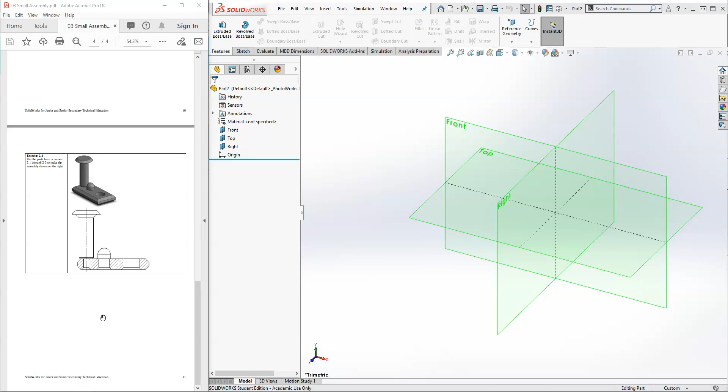Hello and welcome to this tutorial. We're creating this small assembly. It's a three-part assembly: we have a little peg, a large peg, and a rectangular block that they fit into.

If we go onto the resource page on Moodle, the small assembly PDF is there.

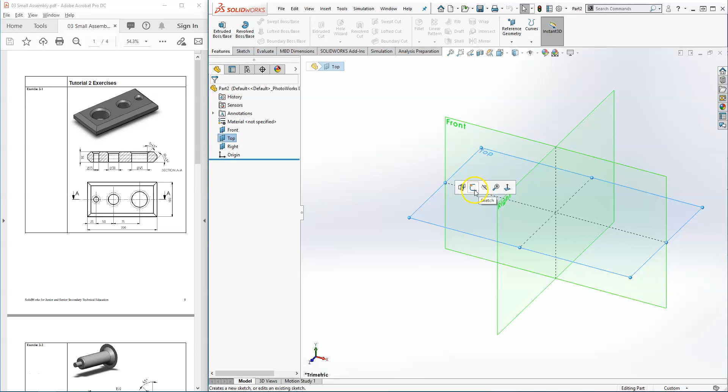Let's get started on this first block. I'm going to put my origin right in the middle of the block. We'll create our sketch on the top plane, and try to make the isometric view the same.

I'm going to create a center rectangle, and turn off my planes. We'll add a few dimensions: 100 by 200. For this first part, that's all I'm going to do.

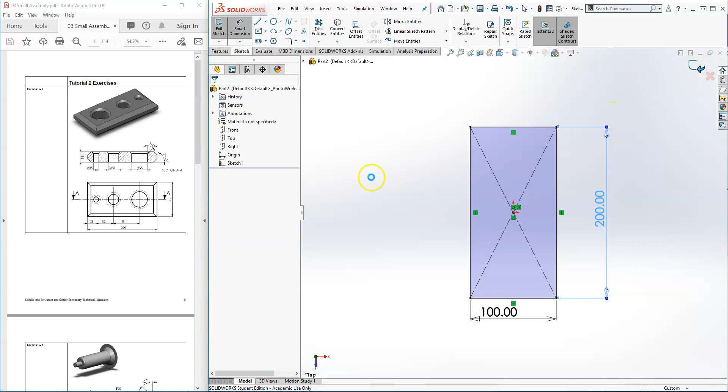Then I'm going to extrude it, extruding it down this time, with a thickness of 30.

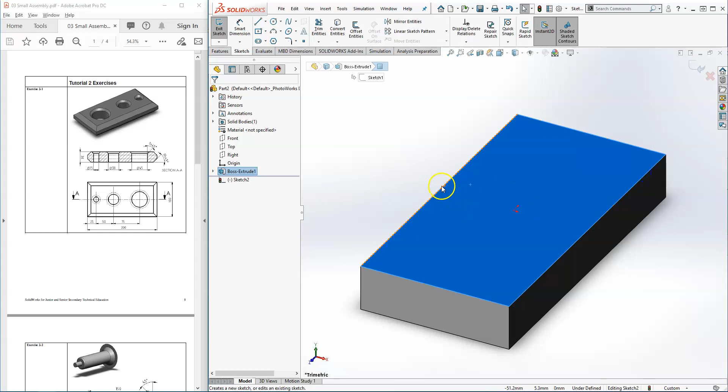So there's the block, and now we're going to add a sketch on top of it with 3 circles. You don't have to be super neat. We'll control-select the 3 centers of the circles, the center point, and the origin, and make them all vertical so they're in a straight line.

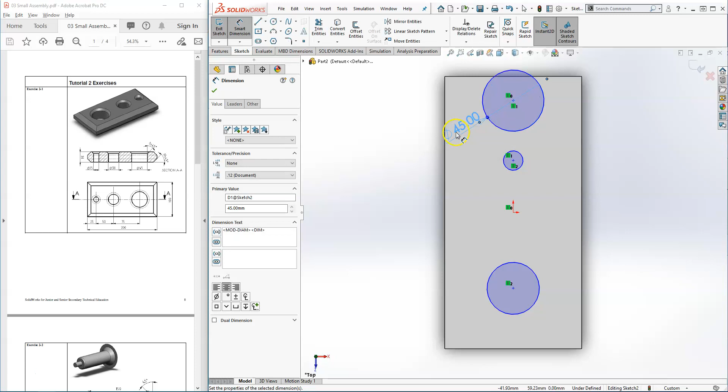Now we'll add some dimensions. The large hole is 45, the second hole is 30, and this last one is 15.

Now all we have to do is add those dimensions that are in the drawing. This one will be 25, and we'll add a dimension between them, dimensioning everything exactly like it appears on the actual drawing.

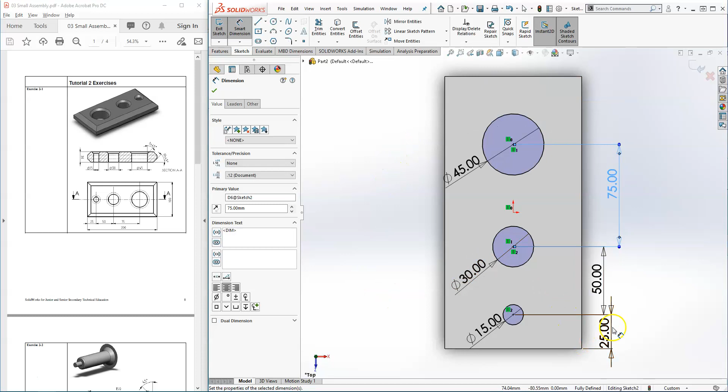It's probably a really good habit to get into, to just add dimensions as you see them on the drawing. We'll cut that. You could have used the hole wizard, but we'll just do a through-all cut of those circles.

Now there are 2 other things: we have chamfers on each of the holes, and a chamfer on both the top and bottom edge. We'll do that top chamfer first.

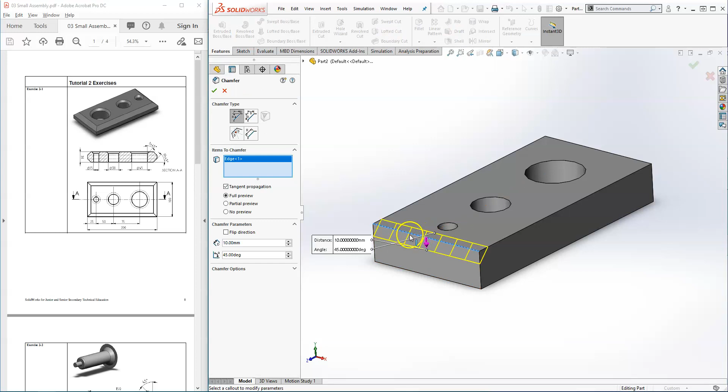The chamfer is under the fillet. We'll select this one, these top edges. You don't actually have to rotate it; you can just find those hidden edges if you hover your mouse close enough to them.

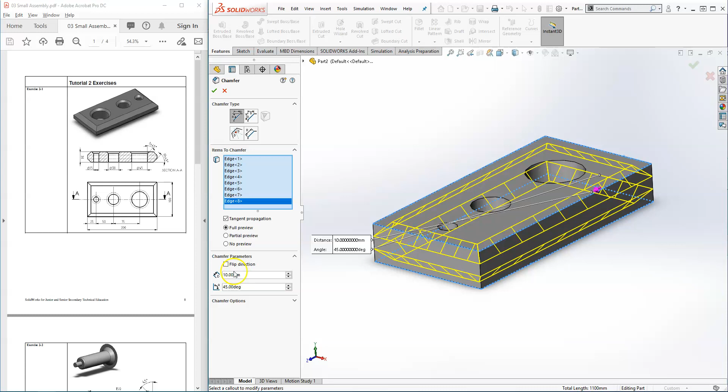So that is a 10 by 45 chamfer. Those are all good. We'll click OK, and now it's starting to look close.

That last one is a 5 by 45. We'll go in here and add another chamfer, typing in that dimension first, 5, then just select those tops of those holes.

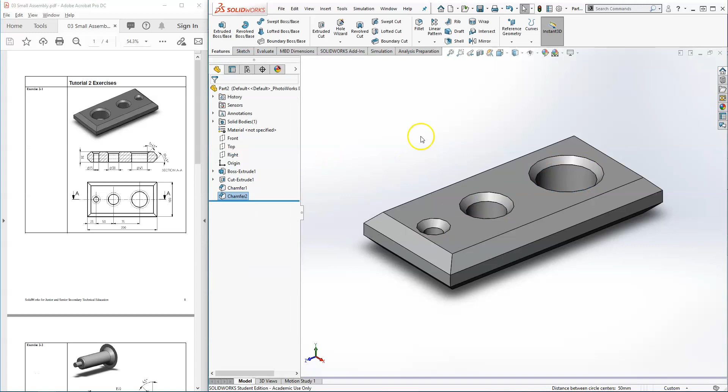And there's our first part. Let's save it on our desktop, and save it as the block.

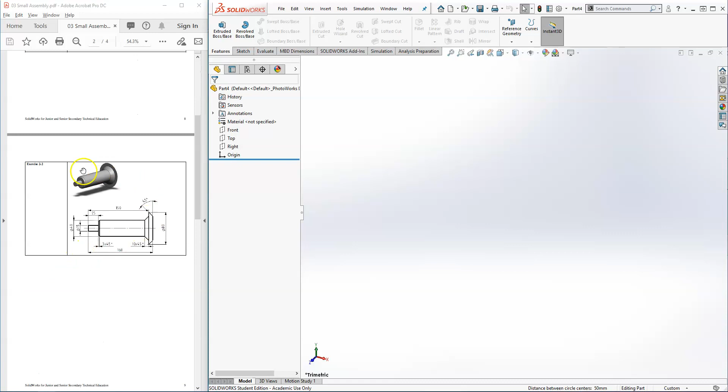Now let's create a new part and look at this one. This one looks like it's a revolved part, so let's sketch on our top plane.

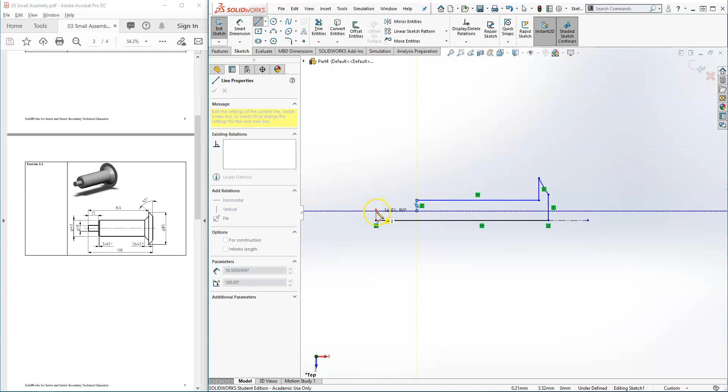Again, with the revolved part, we want to create that center line, and then we will create that profile. I'll add that top chamfer, and then just make 2 other sections.

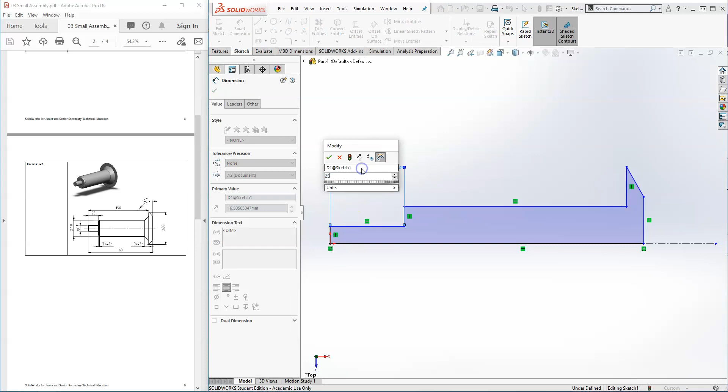Depending on how you're sketching, you do want these vertical and horizontal relationships to be in there, which will help with adding those dimensions. This one will be 25, and again I want to add dimensions just like in our drawing. This one is 150.

That takes everything off the screen. This blue dot is actually that center line, so you can drag it out to know it's there. Remember, F fits your sketch to the screen.

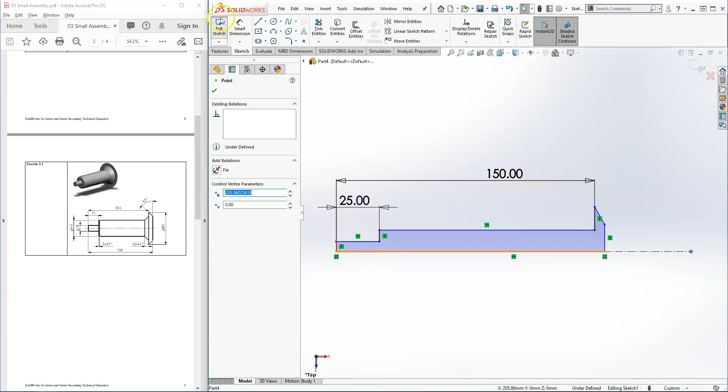The next dimension will be this one, which is 160. Then we start with dimensions of our diameters. Again, selecting that center line and going below, in this case, will get you that diameter. This last one is 60.

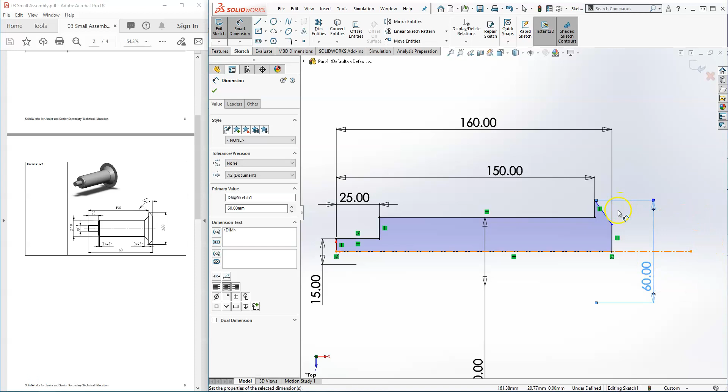I'm not fully defined yet, still under-defined. I still need to do something with this angle because that's not defined yet. Let's go ahead and again try to dimension it exactly like that drawing.

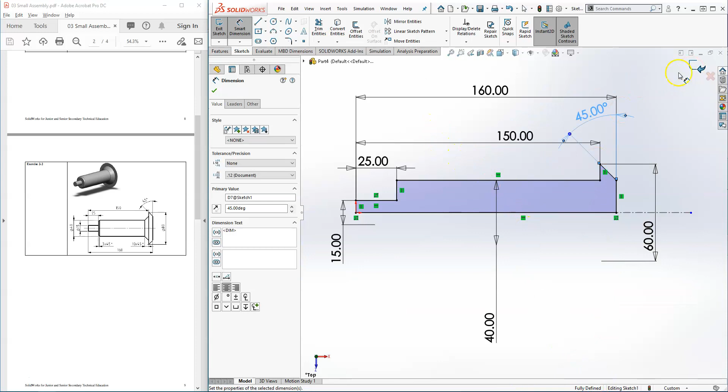Now we're fully defined. If we know we are going to do a revolved boss, you don't have to close that sketch, you can just get right into it. It knows line 1, which is that center line, is your rotation.

Now we put a nice chamfer here, and it's actually 3.

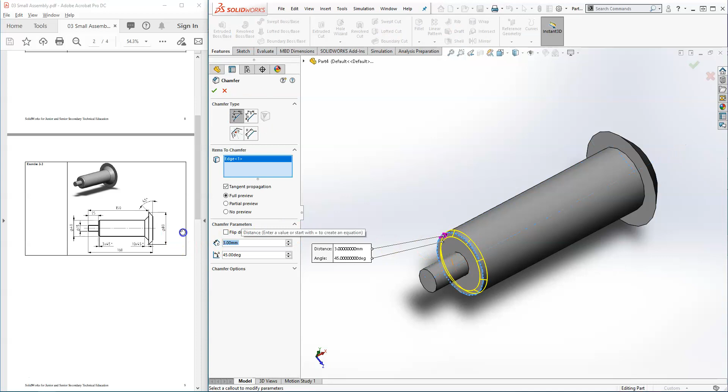We'll go back to our base part, which is this block. You can quickly, with this new button, make assembly from part, so we'll use that, and that brings in our three parts.

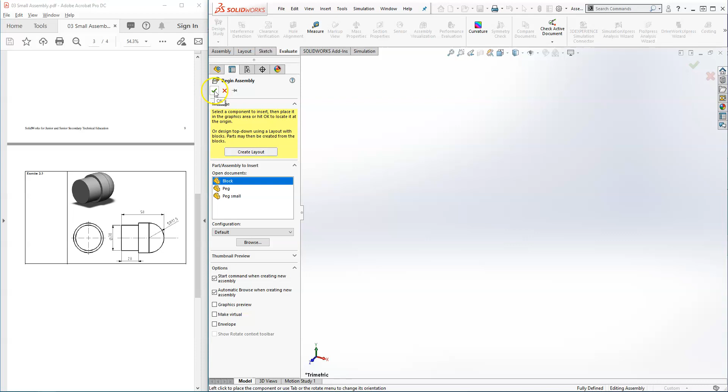We'll start with the block, click OK, and remember by clicking OK there you get it fixed. We want to see this F there because that fixes everything in place. Spatially within our assembly, the assembly planes are exactly the same as our part planes.

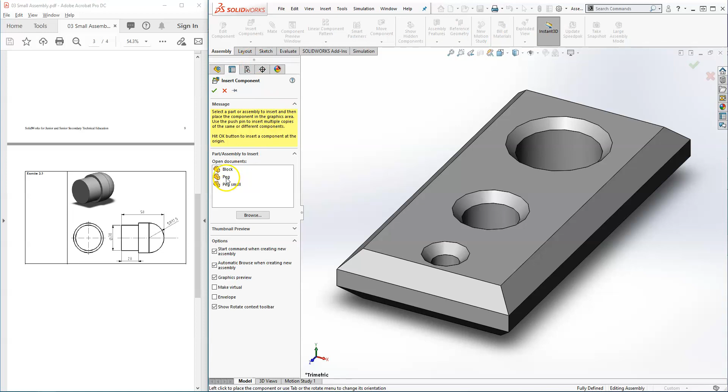For an assembly, again, we want to insert a component. We'll start with the big one, and just place that one in.

For circular parts, we'll go to a mate, and when we select circular features, the one we want is called concentric. That basically puts circle in circle. You can lock your rotation here as well.

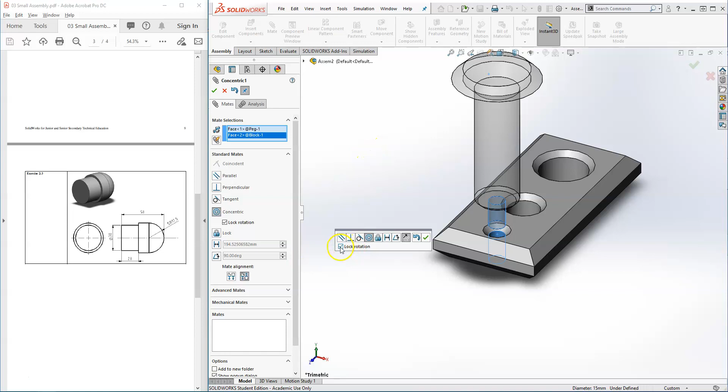We will do that this time because we don't want these pieces spinning. Click lock rotation. If you have a wheel that you want to allow to spin, you can leave that unclicked, and then you can have some motion in your assembly.

So that's that one, and then we'll mate this surface with this top surface as it should be. So there's that one—it's fully constrained, no minus sign there.

Then we'll add that second small peg. That one looks like it'll fit in here. Again, you don't have to push the mate first—you can select the two surfaces, control-select your two surfaces, and then click the mate.

SolidWorks already knows that concentric is the most likely mate for it. Then again, we'll lock that rotation. Now we have the minus sign because our peg can go up and down, which is not good.

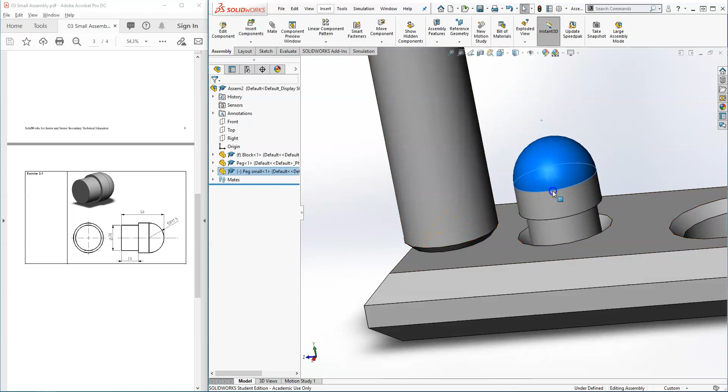I'm just curious how deep we can actually make this, so let's just mate that surface and this surface. Again, control-selecting both of those and then going to the mate, we'll put that in its spot.

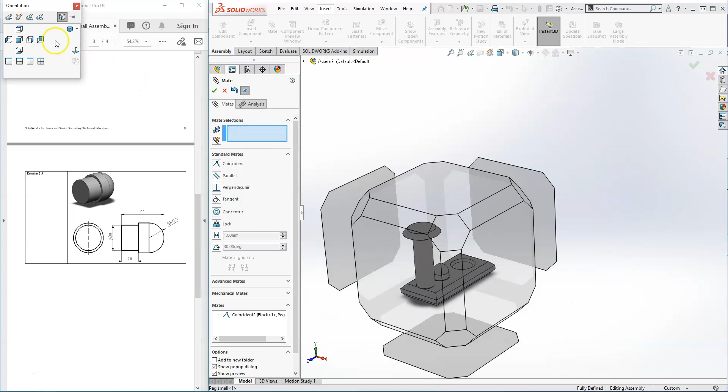And there is our completed small assembly. Thank you.